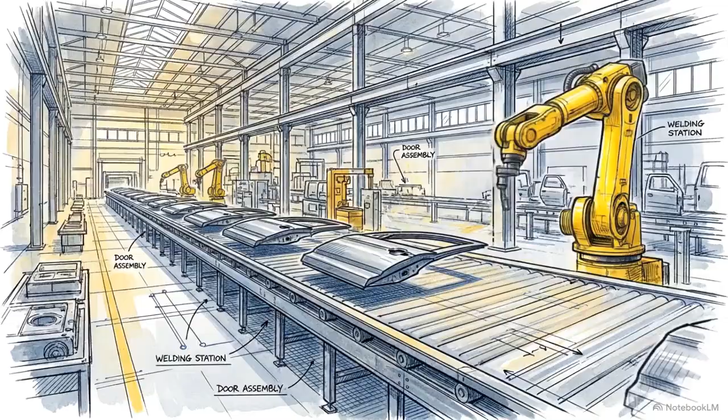For over a century, the global economy has run on a single, rigid blueprint. Manufacturers build massive factories in centralized locations, produce enormous volumes of identical parts, and ship them across the world. This is the traditional just-in-case inventory model. It requires huge amounts of capital tied up in vast warehouses, filled with physical stock waiting for a demand shock that may or may not happen.

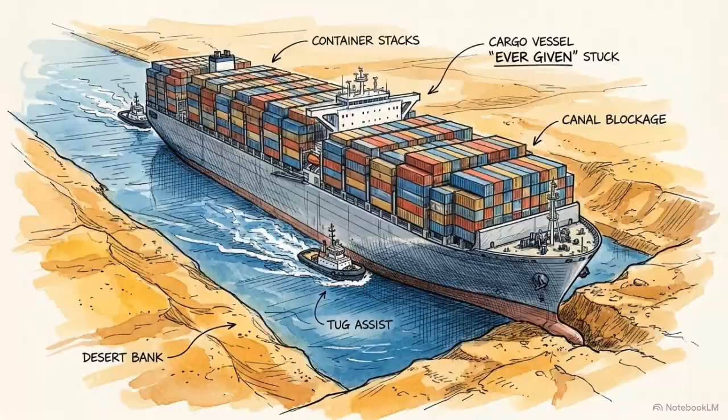But as compounding global bottlenecks have proven, relying on complex, geographically dependent maritime networks leaves global logistics vulnerable to single-point failures. When we look at where heavy industry is heading, the answer isn't simply running mass production at a higher velocity. Speed alone cannot fix a system built on geographic dependency. Long-term viability now demands a complete reconceptualization of how goods are engineered and delivered. Industry must prioritize structural resilience over mere volume.

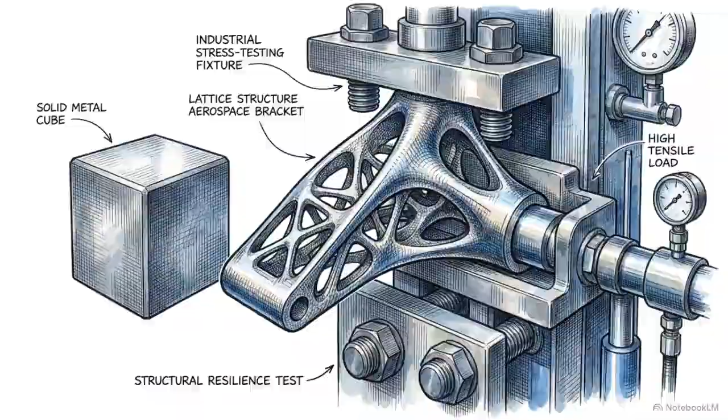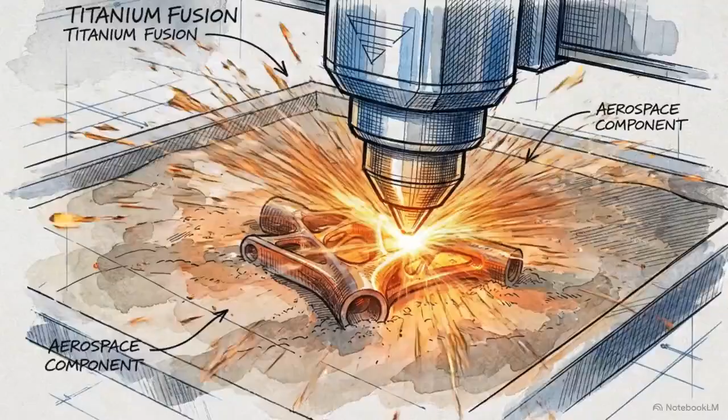The commercial aerospace sector has already developed a direct solution. Organizations like SpaceX have adopted an additive-first culture, using industrial-scale 3D printing to bypass the long lead times and high tooling costs of traditional supply chains. By printing highly complex components on demand directly from digital files, these companies replace massive warehousing with hyper-localized, decentralized production. They transition from just-in-case stock to hyper-efficient just-in-time manufacturing.

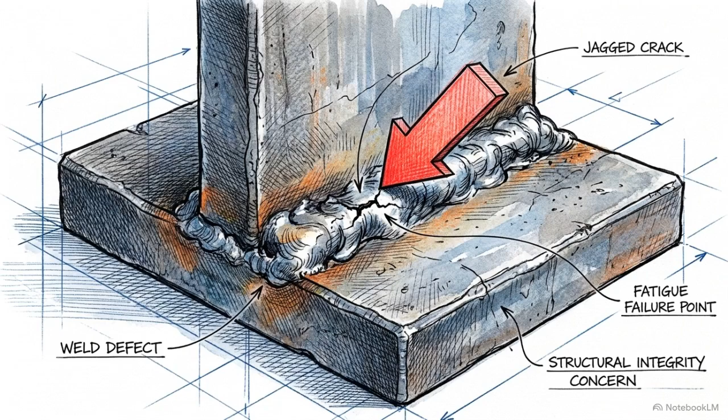This process also solves a major mechanical problem. Instead of taking dozens of individual plates and fasteners and laboriously welding them together, additive technologies allow us to consolidate sprawling assemblies into a single, continuous, monolithic piece. Eliminating those individual components immediately translates to fewer weak points where a weld might fail, and compresses the research and development cycle from months down to a matter of days.

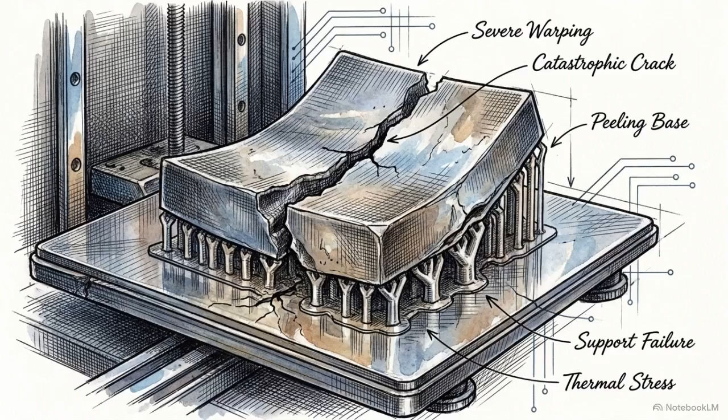In this framework, additive manufacturing acts as a strategic asset for securing operational sovereignty. To actually realize these benefits, engineers have to discard their traditional methodologies. If you take a legacy CAD file designed for standard machining and send it straight to an industrial 3D printer, it will invariably fail.

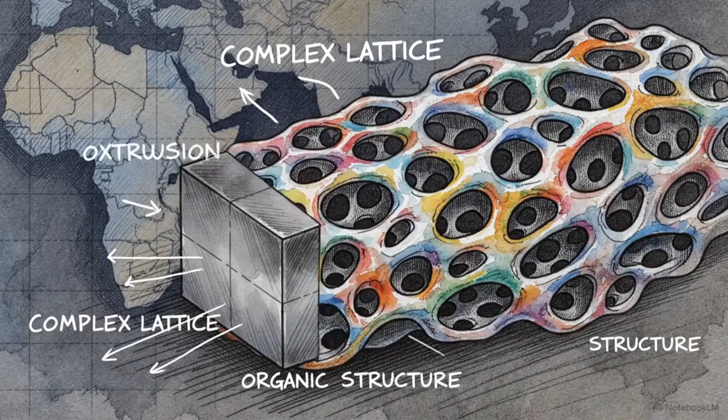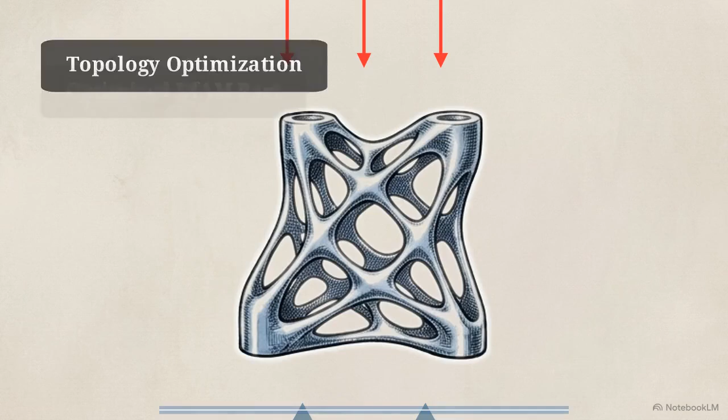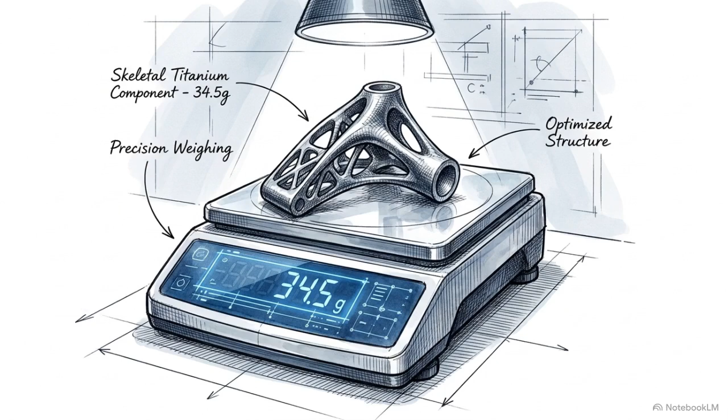Success requires a highly specialized methodology called Design for Additive Manufacturing, or DFAM. This approach exploits the geometric freedom of a 3D printer, which is unbound by the physical limits of traditional drills or molds. A core principle of DFAM is minimizing material usage. Engineers deploy AI algorithms like topology optimization to calculate required mass. These simulate real-world stress, methodically stripping away any material that doesn't actively support a mechanical load. What you are left with is a highly organic, visually striking, bone-like structure. It provides the maximum possible stiffness while shedding every ounce of unnecessary weight.

By adhering to these strict design constraints, engineers extract performance capabilities that are physically impossible to achieve with subtractive machinery. This localized additive blueprint presents a direct pathway for industrial growth on the African continent. Historically, Africa has navigated a severe structural deficit. Despite incredible mineral wealth, the continent relies heavily on an extractive economic model, exporting raw materials while its internal manufacturing sector contributes a disproportionately low 11% to its overall GDP.

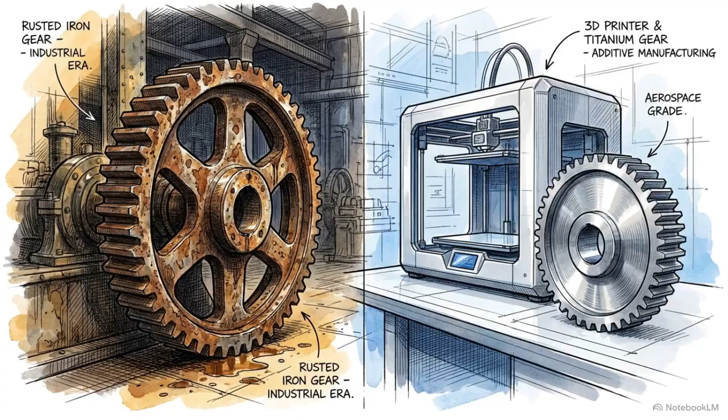But disruptive technology provides a direct mechanism for strategic leapfrogging. African nations successfully bypassed capital-intensive copper phone lines to build world-class mobile cellular networks, and a similar jump is now viable in heavy industry. Nations can bypass the billions of dollars needed for polluting legacy refineries. Instead, they can transition directly into the era of smart, decentralized additive manufacturing, powered by local solar microgrids.

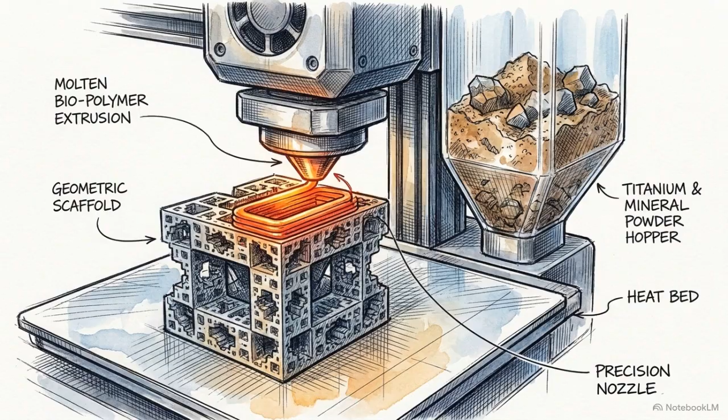With localized printers, communities can directly process native raw materials, like titanium ore or recycled biopolymers, into high-value end products, without relying on intercontinental shipping lanes. Direct digital fabrication changes the economics of resource sovereignty. It empowers nations to retain the value of their own materials, building their industrial future layer by layer, on their own terms.

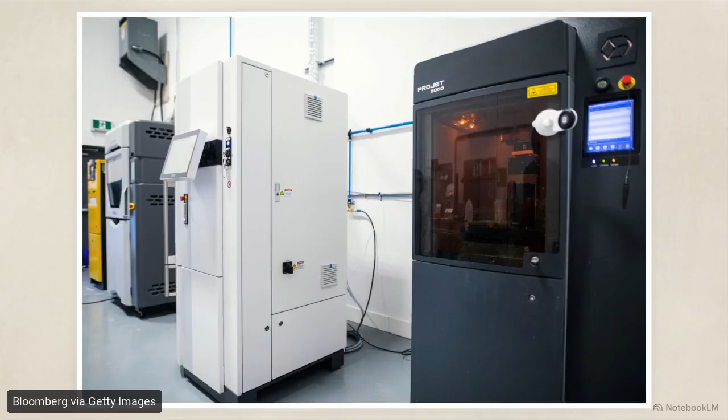However, the most advanced hardware in the world, whether it's a metal powder bed fusion machine or a robotic concrete extruder, means nothing without a technically proficient workforce capable of running it. Achieving lasting industrial sovereignty requires a deliberate recalibration of educational frameworks. We need to foster innovators who inherently understand the complete end-to-end life cycle of digital design.

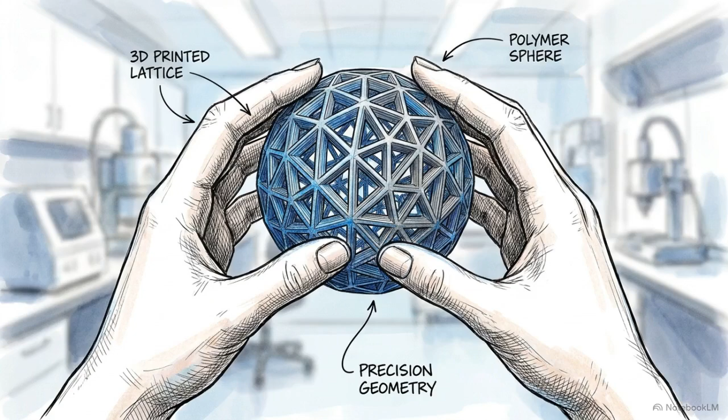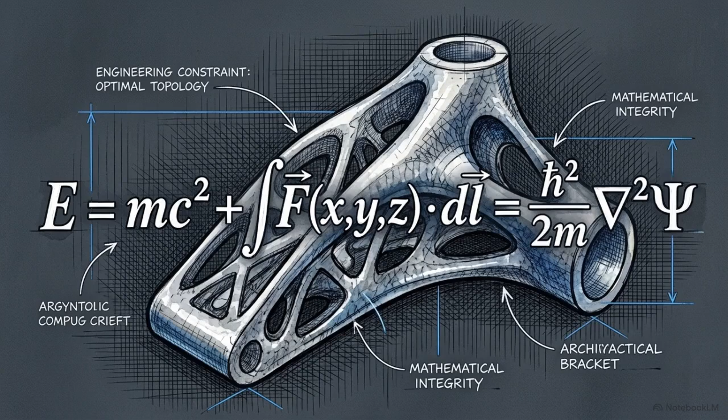We are starting to see this grassroots empowerment take shape. In Nairobi, Kenya, initiatives like the Lavington Girls' School Unity Art Club are bringing 3D printing technology directly into the hands of young students. This technology gives students a direct path from an abstract digital concept, solidifying layer by layer into a physical artifact. This creates a crucial pedagogical shift. It teaches youth that an impossible geometry is no longer a barrier to creation. It is simply an engineering constraint, waiting for an optimized mathematical solution.

By bridging artistic expression with digital fabrication, these schools produce the designers and engineers who will direct the continent's industrial self-determination.